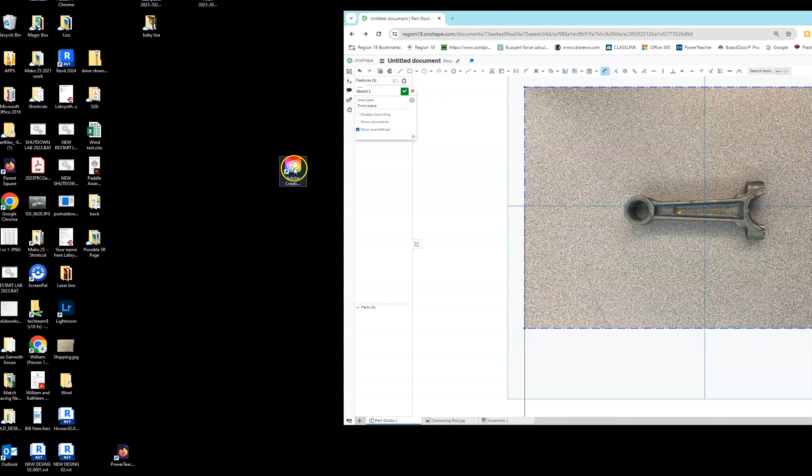So I'm going to the Creative Cloud and I'm going to open up Photoshop. If you haven't logged in before, it may ask for your login information. You can use your school login information.

So I have a photo that I took with my phone, and I'm just going to open that photo up in Photoshop. Now you can see that a bunch of the photograph is something that I don't really need.

So I'm going to come in here with the cropping tool, and I'm just going to crop this photo. I don't want it to be a scaled crop, so I'm going to click here and just do what do I want to do? It's not allowing me to crop in both directions.

Well, it really doesn't matter. I'm just going to crop the width dimension because that's the one that matters for me. So I'm going to crop this guy, and notice I have these lines on my cropping tool. So if my picture isn't quite straight, this would be a good time to rotate the picture so that things are squared up. And that looks pretty square to me.

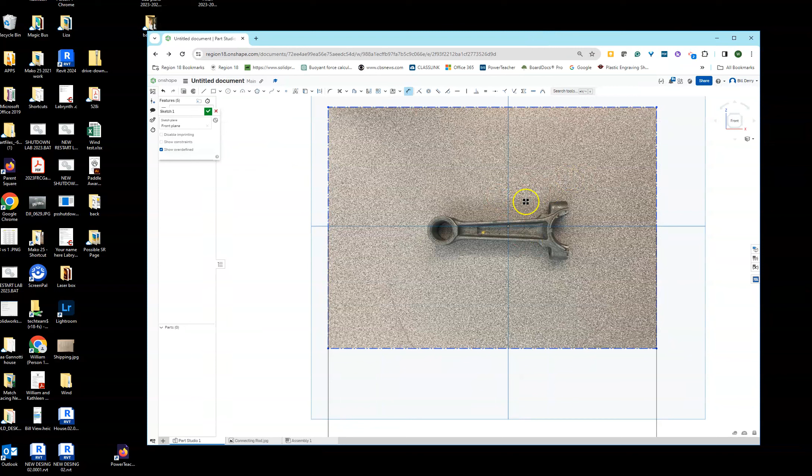So now I've got the picture in a more suitable format for Onshape. Notice when I brought it in initially, I had this going on. I'm going to delete that. Get rid of that sketch

and create a new sketch on my front plane. Come on. Front plane. Front plane. Here we go.

All right, and then I'm going to say insert image, and I'm going to go to import, find my cropped one, and as soon as that comes in, I'm going to click on that and click and drag. Now notice, now I just get my image here.

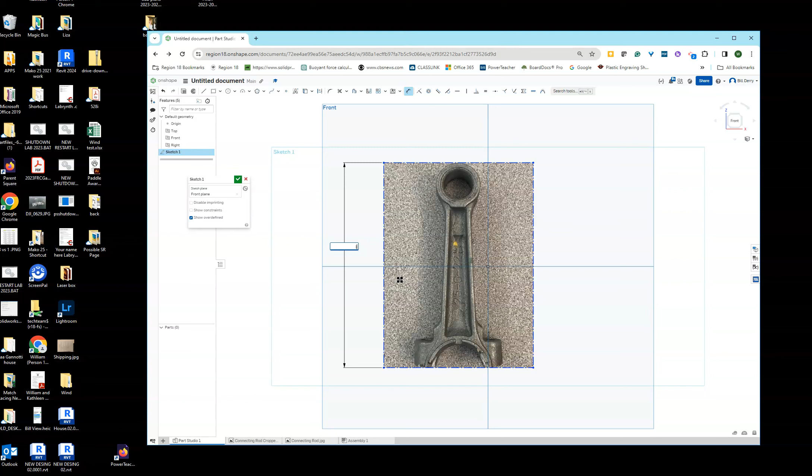If I grab my dimension tool and I can put in the dimension that we determined, I don't remember what it was. Guys, what was the length of our connecting rod? Just under 4? 3.98 or something? All right, so now I can make that 3.98 inches.

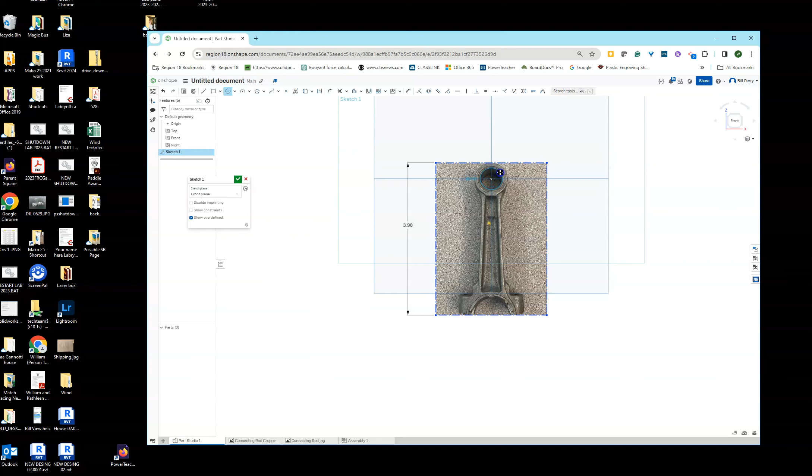And I'm going to go ahead and take that, set that on the origin, and come in and start drawing that picture. And I know that this was, I don't know, 5 something, 0.526 or something like that.

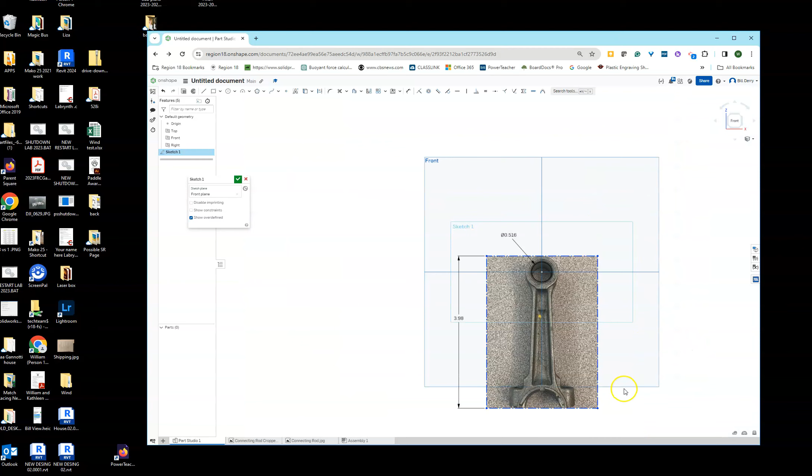I'm on my way to getting that. So that's how I would do a sketch picture in Onshape. I would just crop that photo and edit it in Photoshop first. That way when you bring it in, you can scale the important part. If I find out more on how to do this, I'll share that as well.